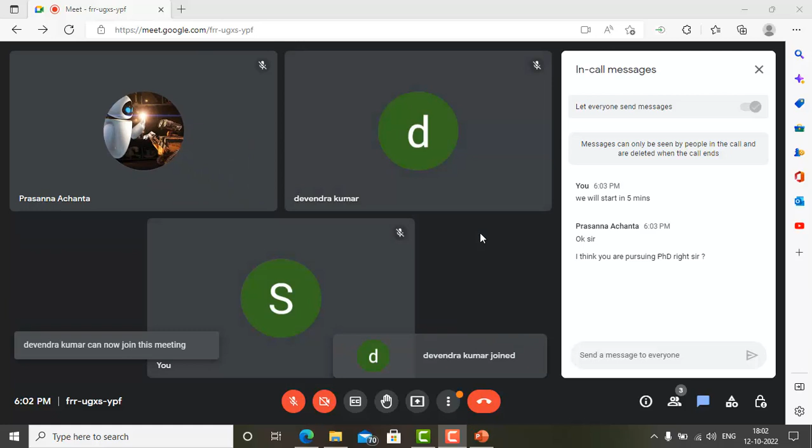Yes, I am pursuing PhD in IISc Bangalore. Currently, I am in fifth year. I will soon write my thesis. Sir, my domain is basically in fracture. I see the effect of electric current pulses on the fracture behavior of material, mostly aerospace alloys, aluminum alloys or steel.

Sir, I heard that in IISc Bangalore we can complete PhD in 3 years. Is it right, sir? No, actually, it depends. In some labs, there will be different professors, right? So every lab has a certain culture. So in few labs, you can complete your PhD in, let's say, 4 years. Minimum is 4 years, not 3 years. 4 years minimum is required, and in some labs it requires 7 to 8 years also, because the professor is not satisfied with the work.

So it depends. It's not like every person will leave IISc in 3 or 4 years. So you have to ensure that you are choosing the right professor if you are coming to IISc for PhD, depending on your topic of interest, and see if you are going under the correct professor or not. Okay, sir. I got it. You want to pursue PhD further? Yes, sir. Okay.

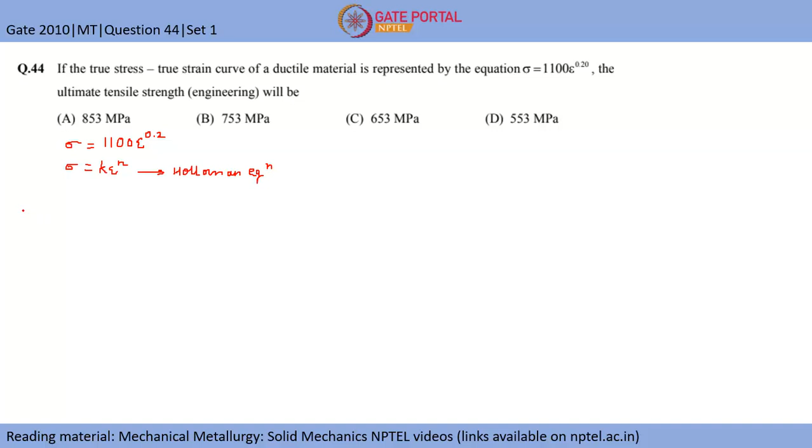So first of all, we have the equation sigma = 1100 epsilon^0.2. This is basically the Hollomon equation, which is given by sigma = K epsilon^n. This is the Hollomon equation. What Considère's criterion says is that d sigma / d epsilon should be equal to sigma. This is basically Considère's criterion.

Okay, so now we will substitute this sigma in this equation in both the sides. So d(k epsilon raised to power n)/d epsilon is given by k epsilon raised to power n. We have substituted sigma in this equation basically. So now you have to take derivative of this, which will come as n, k will be remaining as it is, epsilon raised to power n minus 1, and this will be as it is. So k got cancelled. So basically this equation boils down into n is equal to epsilon. So this condition is achieved at UTS.

So basically when the true strain of the material is equal to the strain hardening exponent, then UTS is reached. So here we don't have the value of epsilon. This is basically k epsilon raised to power n, and n value is 0.2. So from this equation we will get that the value of true strain at UTS is basically 0.2. Let us term this as equation 1.

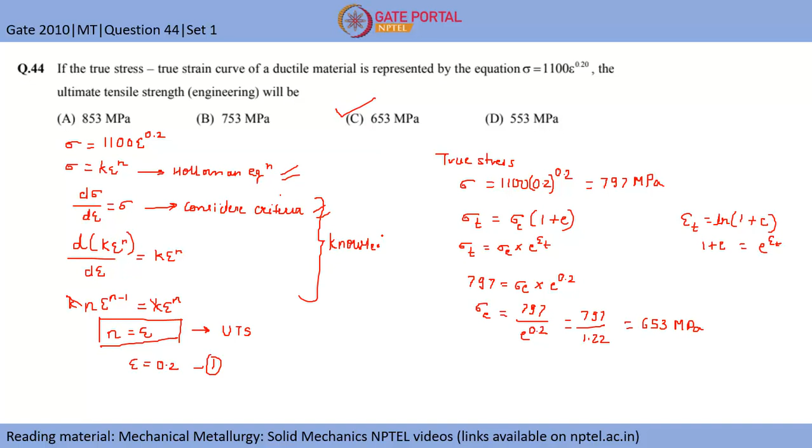So first thing is basically you need to remember Hollomon equation and you need to remember this Considère criterion. These two are the important equations here. This is first equation and this is second equation. And for GATE, this derivation is time consuming. It should not be the case when you are solving. This is for your knowledge only. You can keep in mind that at UTS the true strain is equal to the strain hardening exponent. That you always keep in mind, and rest of them are simple basic formulas.

So first formula we used was Hollomon equation, second was this Considère criterion. If you don't remember this, just remember this as third formula, and fourth formula was basically this, and fifth formula was this. So total 5 formulas we used here. So you can jot down all these 5 formulas in a separate sheet, so that if any question comes corresponding to these formulas, then you will be able to answer it easily. I hope this question is clear.

Yes, sir. Yeah, Devendra, it is fine now.

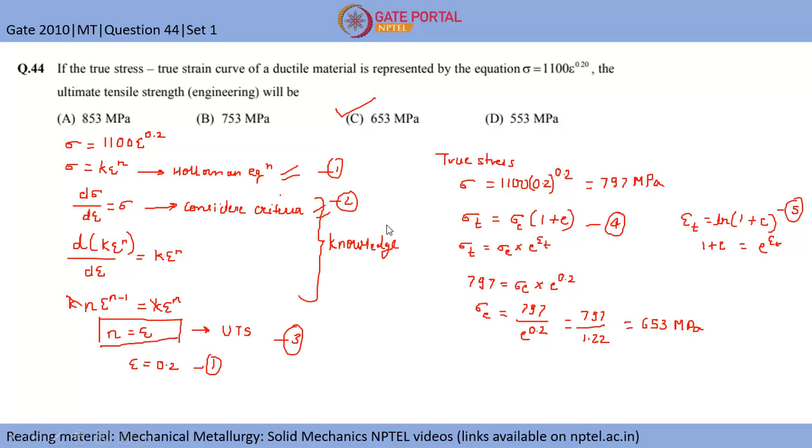Yes, sir. Fine. Okay. So now we will move on to the next question, which will be again formula based. I guess many of you may know this formula. So I will give you 2 minutes to solve this. If you have studied rolling, then this formula is given in every book. If you refer Dieter, then also this formula will be available. It's a simple one. Try to solve this in 1-2 minutes, then we will go through.

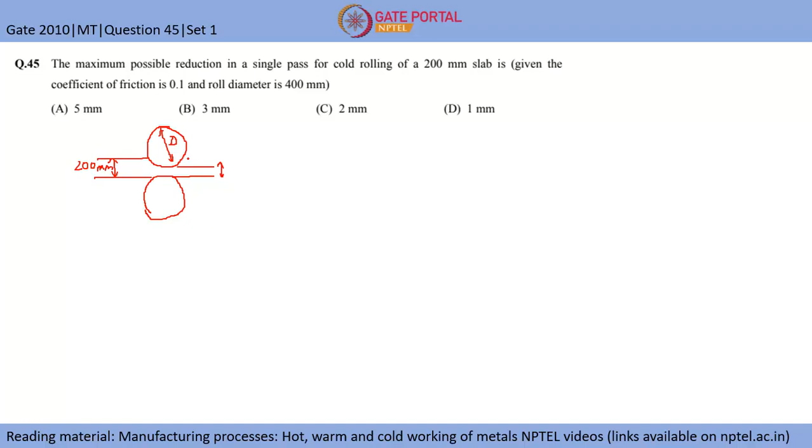So there is one criteria which tells that in one pass, depending on the friction and the diameter of this roller, so let's say this is D, and the friction between the specimen and the roller is mu, the maximum reduction of the slab H max will be given by mu square R. So mu is the coefficient of friction between the roller and the sample, and R is the radius of the roller. So we have given mu equal to 0.1 and diameter of roller equal to 400 mm. So radius of roller will be 200 mm.

Now substituting these values in this equation, mu square will be 0.1 square and R will be 200 mm. So this will be 0.01 into 200, which will be equal to 2 mm. This is the correct answer. So the correct answer is option C. So one thing you should remember in this question is, this value which they have given is a redundant value. The thickness of the slab, or let's say a sheet, is not required here. So in a few questions you will be given certain values, but those values won't be required to solve the question. That you need to remember.

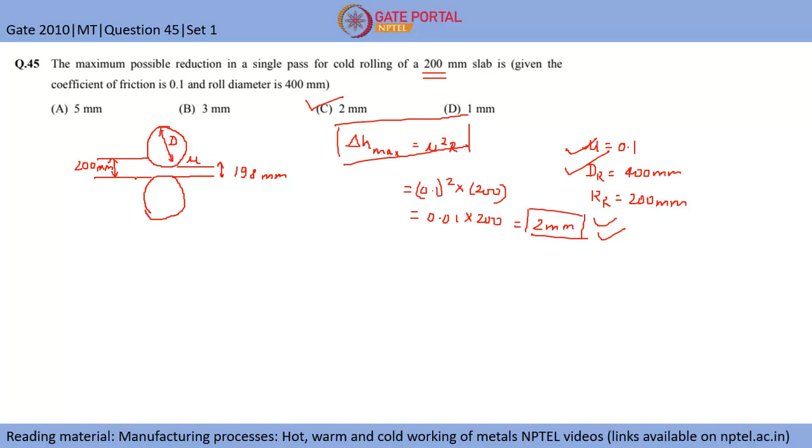So most of the times this formula will be asked. This question comes many times. So jot down this formula somewhere. Okay, so now I will go to the next question, which will be again a numerical. There are two questions in that. So this is the question. So try to solve question 50 first.

Here the dimensions of an aluminum alloy rod are given, and the tensile load is given along its axis, and modulus and Poisson ratio are given. You need to find out, when this load is applied for that cross section area and length, what will be the reduction in diameter on the application of tensile load. You try to solve it, then we will go through the solution. Basic stress strain equations you have to apply here.

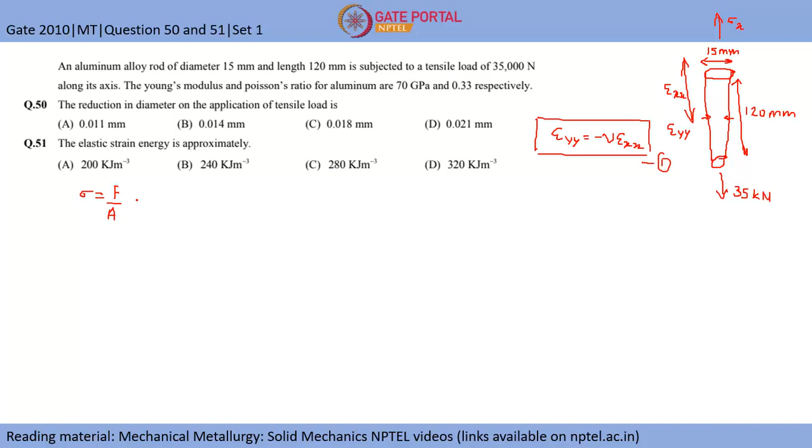And these two are related with each other by this formula: epsilon yy will be given by minus nu of epsilon xx. So let's call this as equation 1. Now we know the load, we know the cross section area. Let's calculate the stress. So the stress will be given by force per unit area. We know the force is 35,000. And the area will be given by pi d square by 4. D is 15 mm, so 15 square by 4.

So this will come out to be 35,000 into 4 divided by pi into 225. So let me calculate this. 35,000 into 4 divided by pi into 225. So this comes out to be 198 MPa. Okay, so mark this as equation 2. So we have calculated the stress, which is 198 MPa because of 35 kilonewton load. Now we will calculate strain.

Calculation of strain. So this will be given by Hooke's law: E is equal to sigma by epsilon. So epsilon will be sigma by E, right? We know that stress is 198 into 10 power 6, divided by modulus, we have given 70 GPa. So I am converting everything in pascals. That's why this is 198 into 10 power 6 pascals and modulus will be 70 into 10 power 9 pascal.

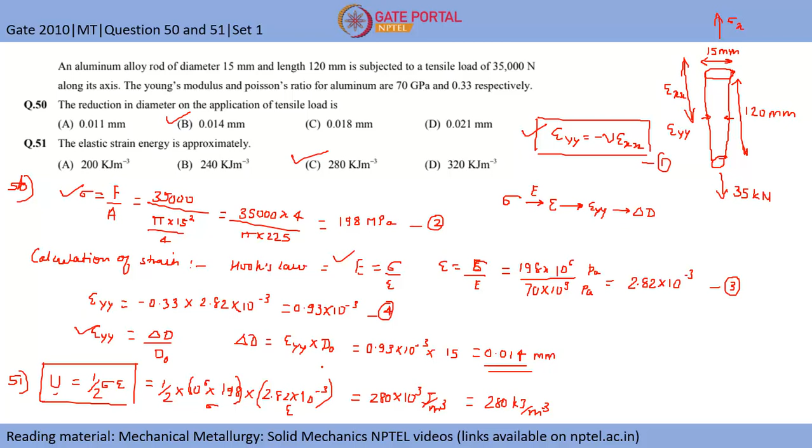So this is the formula for strain energy density. And this is given by, basically, if this is the tensile curve, the area under the Hooke's law, this is a triangle, right? So this is sigma, this is epsilon. So the area under this curve will be a triangle, which will be half of epsilon into sigma. This is basically the strain energy density per unit volume. That's all. Any doubt in this question anywhere? Clear, sir. No, sir. Okay, clear now.

Okay, so that's all for today. I took 4 questions of basic mechanical metallurgy. Simple formula based questions were there. In every slide I have marked which are the important formulas. You just jot them down somewhere else so that you can revise these formulas. These questions are basically formula based. You just have to put values in the formula and you will get the answer. That's all. Is this fine?

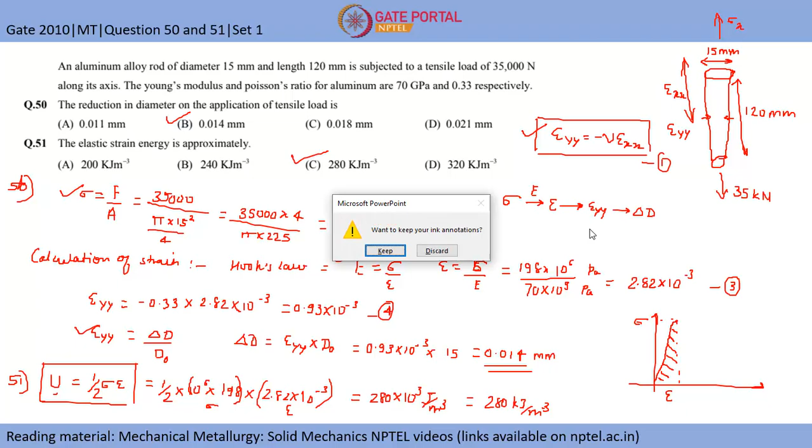Yes, sir. Okay, so in next class we will deal with 4 more questions regarding mechanical metallurgy, or let's say physical metallurgy. If you have any doubt for this class, you just ask me. We will discuss that. Otherwise, we will close this session. Any doubt, both of you? No, sir. Clear, sir. Okay. Then we will meet in next class where we will again go for 4 different questions from the same paper, GATE 2010 metallurgical engineering paper.